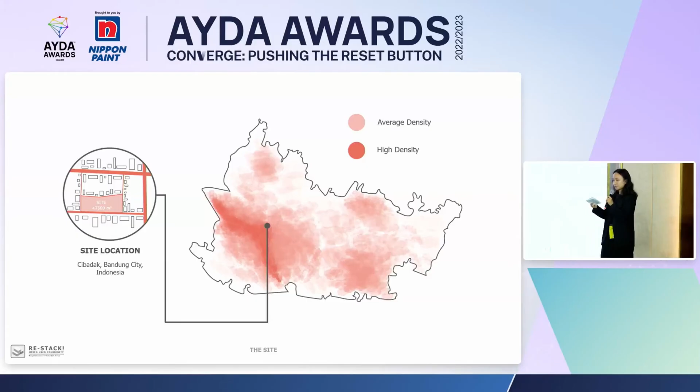Here is the map of Bandung city with its density, and Cibadak is categorized as the most dense area. Here is the site I chose for the regeneration, since it has potential as the first development in this area, and it's approximately 7,500 square meters.

The site is typically dense like the others, since the building order is unregulated well. There's some unused open space left in every area, and this makes me think of how the site could be more lively if we regenerate it.

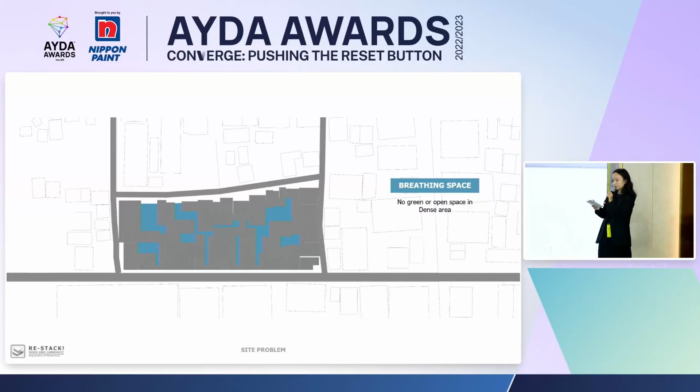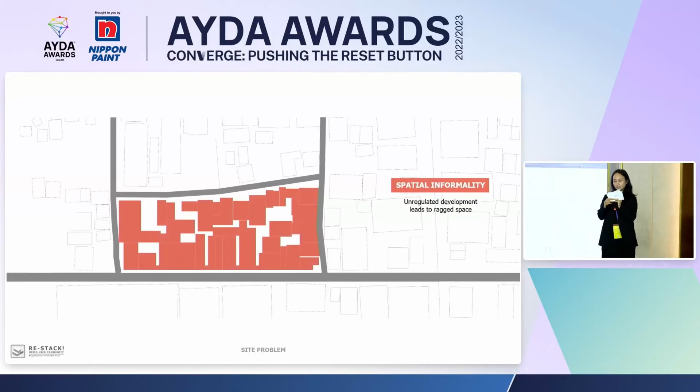As for the site problems, I try to break it down into three main issues. First is about the breathing space, which leads to the lacking presence of green areas from the unused open space. Second is about spatial informality, leading to unregulated development of the site and creating ragged space. Third is about inactive areas, especially at the back of the site, which leads to security issues.

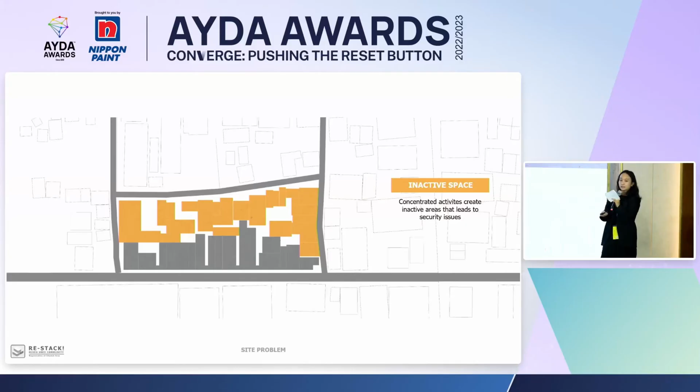To solve these problems, there are three main strategies I used. First is relink, to solve the inactive areas by reconnecting paths from the disconnected existing alleyway. Second is restack, to solve the spatial informality of the housing units by readjusting the existing buildings to create a better public realm. Third is re-empowerment, to solve the breathing space issue by giving a sense of placemaking to the inactive areas.

Next is the design process. This is the zoning of the existing site. There are three zones: the blue one as the shops, pink as housing, and orange as landscape.

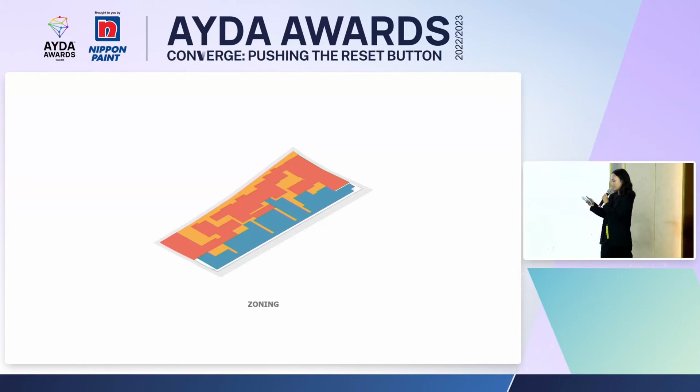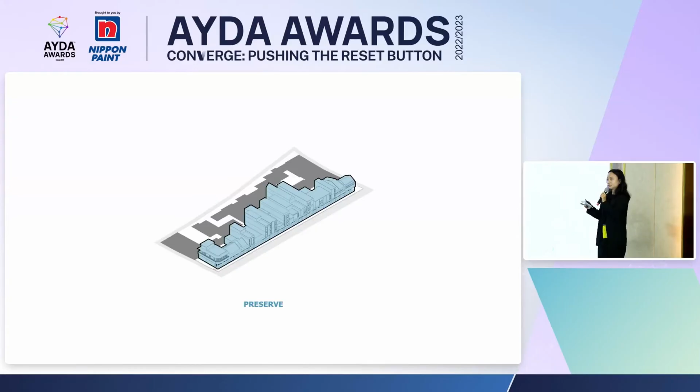The idea for the shops is to preserve the street front, so no changes to the facades are made. This old shop complex with long history only reconstructs the streetscape by improving its vibes, enhancing the vitality of urban public space. As there is a closed passageway, the strategy is to open the linkage to the back of the site, connecting the front and back, linking the alive active complex and injecting new vitality and charm inside.

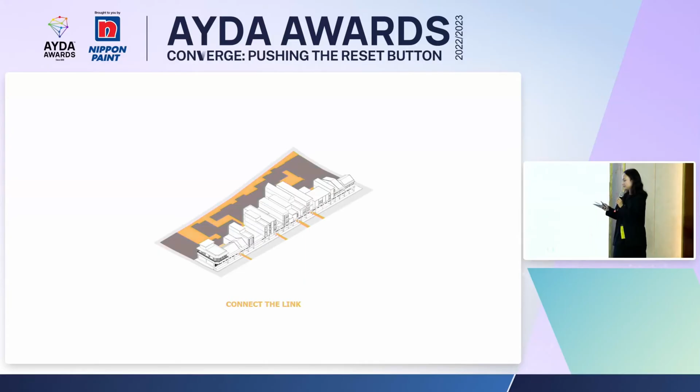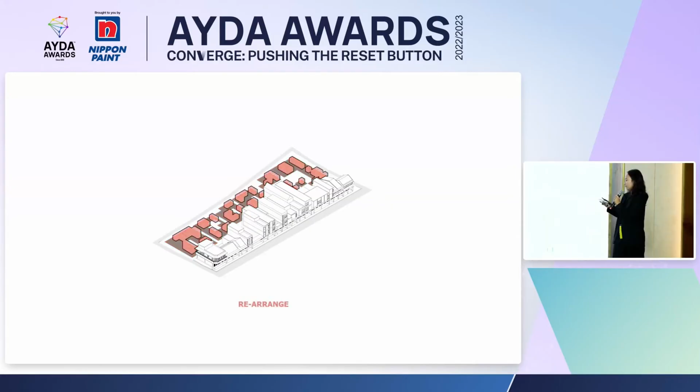For the existing housing units, I try to rearrange the buildings and give additional function as the new strategy. By stacking the function, each housing unit now has a commercial area and a greenhouse.

So, following the design intent of creating an urban life between the old and the new, the overall design gives a colorful, simple quality to create a social field for daily life.

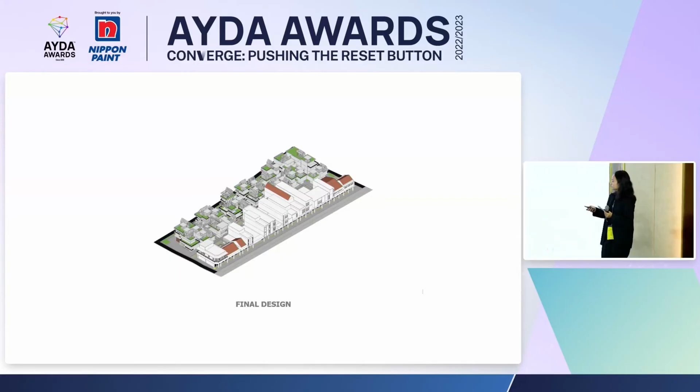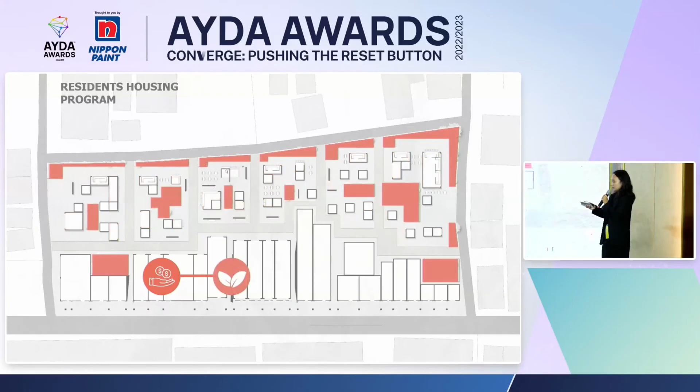Now let's jump to the design programs. For the programs, I make two main programs: first for the residents, and second for the public or visitors. For the residents, each housing unit now has commercial space to lend as the new generation strategy, and they also have parking in inner courts, parking units, and entrance.

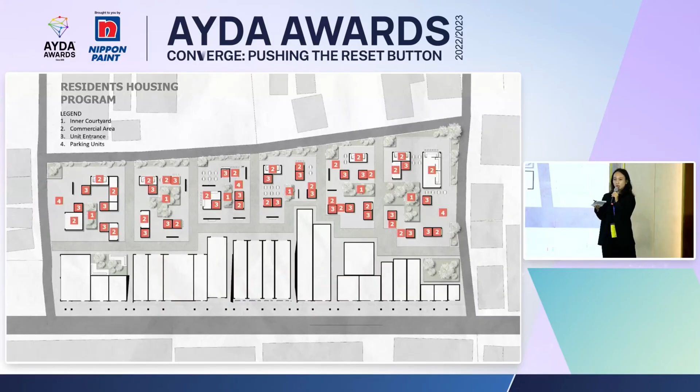Here is the site plan. There are a total of 25 housing units based on the plot pattern from Google Maps.

Here, the new generation of the housing units feels the blend of historic and modern life, injecting new local cultural identity through social memory, forming a new place of urban life, constructing the social field for daily life.

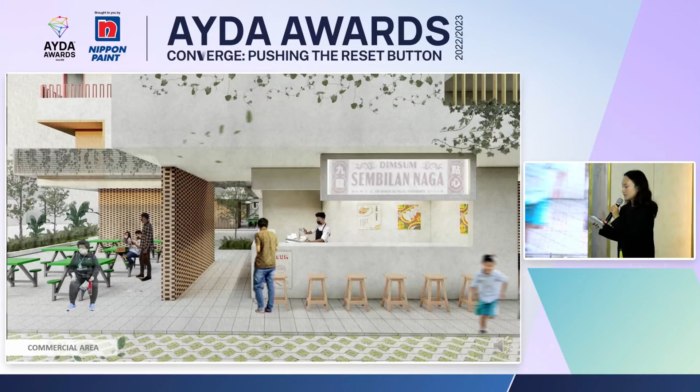Through the fully open commercial space, unfolds a chapter connecting the past and the future along Cibadak area. The smell of cooking wandering around the streets responds to the alive and active urban life.

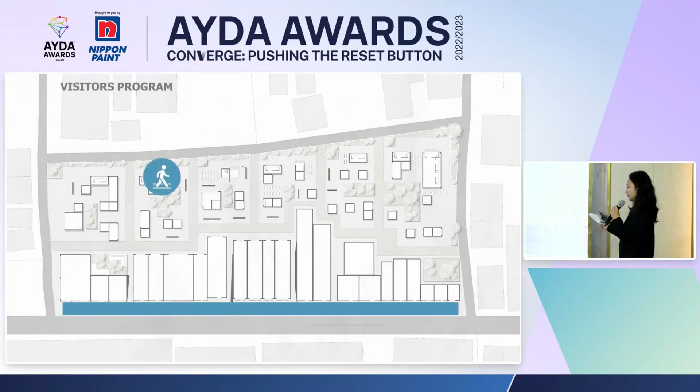Next we have the visitor or public program. First, they can walk into the street front and enjoy the walking experience at the old shops, and maybe buy some things at the shops. After that, they can go to the park by enjoying the connected alleyway.

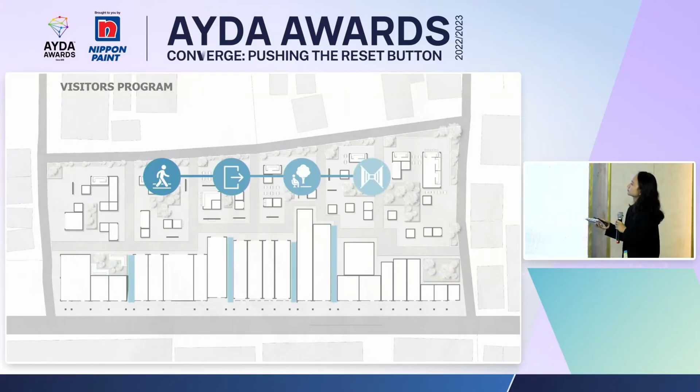Feeling the joy of walking on the street front area, while the charm of the old shops offers romantic imagination and emotion.

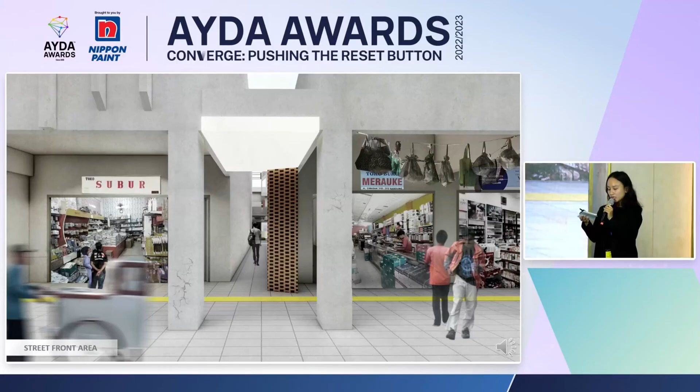While the charm of the old shops immerses you, the pop-up of the reopened alleyway will take you to new places.

Through the alleyway, we can feel the charm of the blocks offering people the experience they desire, as if they're traveling through time and space, feeling the blend of old and new, as well as the intersection of history and present.

The fun connection between the street front, the alleyway, and the public pocket creates a light walking atmosphere combined with different architectural outdoor spaces, setting up spots to meet the visitor's basic behavior of standing, sitting, talking, or maybe playing together.

The creation of progressive scenes builds the visual perception that movement and stillness coexist in harmony. Sometimes it's lively, and sometimes it's a leisurely strolling lane. These various scenes and vibes endow businesses with different emotional experiences.

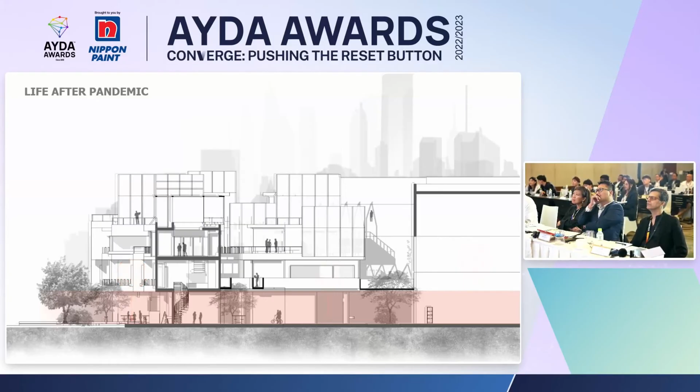The design can improve the quality of life of the residents and also help sustain the economy, especially after the pandemic break, increasing social life and improving the environment. After all, this is where people can live and gather, making a strong community.

Welcome to the new generation of Cibadak area, where we can meet the diverse needs for different users. Feel the stacking materials and masses, injecting new vitality and charm to the business through the combination of old and new, as well as the intersection of history and the present.

Curling upward and going through the hustle and bustle of streets, the linearly extending streetscape becomes the core of circulation of the entire area, spreading out romantic imagination and emotion, creating a light urban atmosphere and scenes, making the whole space more coherent and natural.

After all, Cibadak has its own understanding, communicating, and contriving of what is required to combat their difficulties. This idea can also be applied to similar area problems around the world.